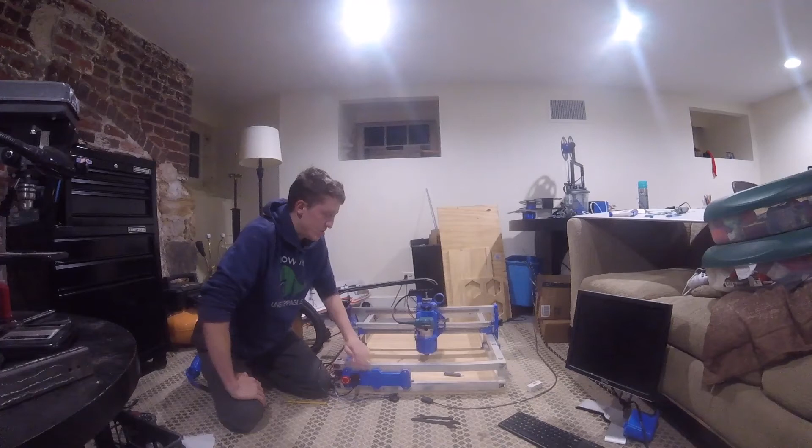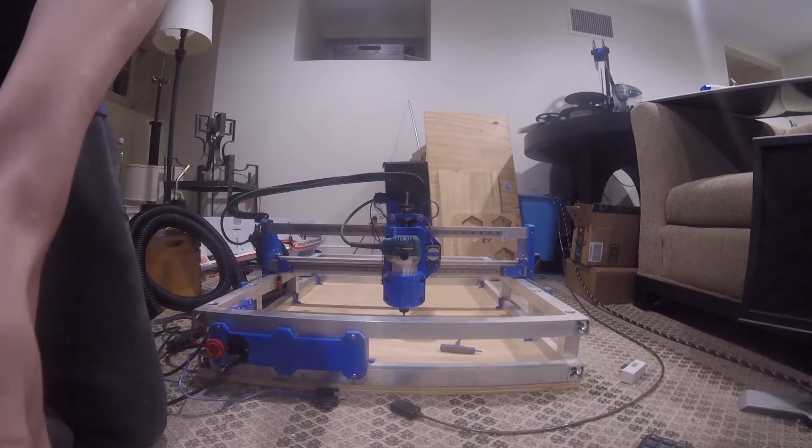I'm going to try and cut this down, we'll see how that goes. Alright, let's get a little closer. Hopefully you can see everything alright. I'm doing this on a GoPro right now, so I don't really know what you're seeing, but it should be decent.

So this is my 3D printed CNC router. Well, it's partially 3D printed. The blue stuff is 3D printed. This square stuff is aluminum tubing, and then this stuff is some sort of steel, I'm not sure. But anyways, this is a 3D printed CNC router.

It was not designed by me, it was designed by Ivan Miranda on YouTube. I'm going to try and post his channel and the plans that he posted in the description, because it's really awesome and you should at the very least check it out. I'm not saying you should build it.

But a CNC router, there are two parts. CNC is kind of just a type of machine - it takes commands from a file called G-code and moves around accordingly. It's kind of vague because you can make a lot of things CNC, but the router bit is just a router. It's basic, sort of similar to a drill, obviously very different, but there's a little spinny thing down here that'll cut stuff. So it moves around pretty precisely with instructions from a computer and cuts stuff.

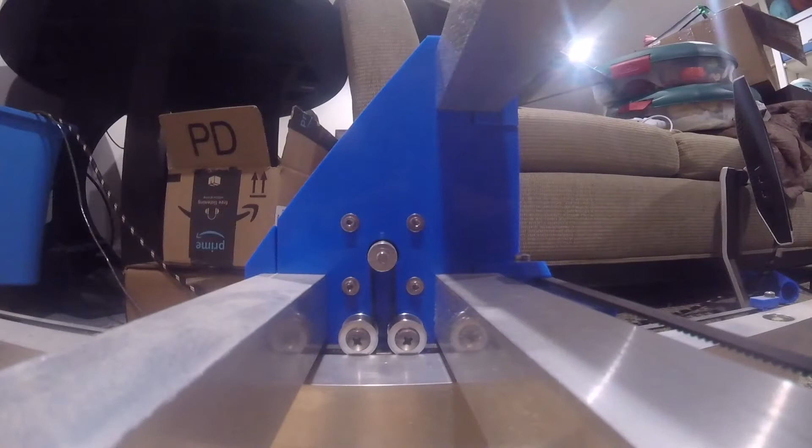Okay, so hopefully you can see this. There is a motor on the other side of here, you can't see it, it's there, trust me. And so it can spin. One of the greatest questions of mechanical engineering is, how do we turn rotational motion into linear motion? This is one way to do it. This little thing has some teeth on it, this belt also has teeth on it. So when this spins, it moves it back and forth.

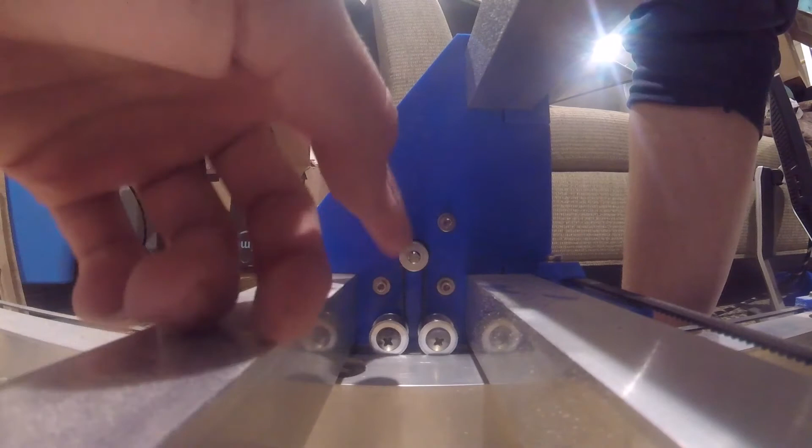So I'm going to move the y-axis right now, and you should see that motor turn. There it goes. So if you're wondering how that's working, it's essentially just a flexible rack and pinion, that's how I like to see it. It's a little different, obviously, but instead of the rack we've got this belt, and instead of the pinion we've got this pulley. Alright, I'm going to bring back out now.

So that's the drive system, and all the wires for that are routed through the machine, and also in these cable carriers. Let's see, what else should I talk about? I'm going to talk about one more thing on the electronics, and then I'm going to talk about how it's built.

I want to touch on these limit switches. There's one there, you can probably see this one. Basically those limit switches are positioned at the end of travel. So if I didn't have those there, it's going to keep going and keep going, and because I am only human, I make mistakes, and sometimes I will accidentally tell it to move somewhere that it's not allowed to move. There are ways to make it so that doesn't happen, but they're pretty involved and I don't like them. This solution is better, for me personally.

Other solutions exist, but basically if the machine goes too far, it's going to hit this limit switch. So if it goes, let's say, too far to the right, this limit switch will get hit, and there'll be continuity. There's just two wires coming out of there that are run all the way through this tube, then through the cable carrier, then into the Arduino, and the Arduino will be like, oh shoot, the right end stop has been triggered, and it will shut off the machine, and it'll be like, hey Vann, the limit switch went off, what the heck happened? And it'll sort of tell me off, and I have to fix it. But yeah, that's what those do.

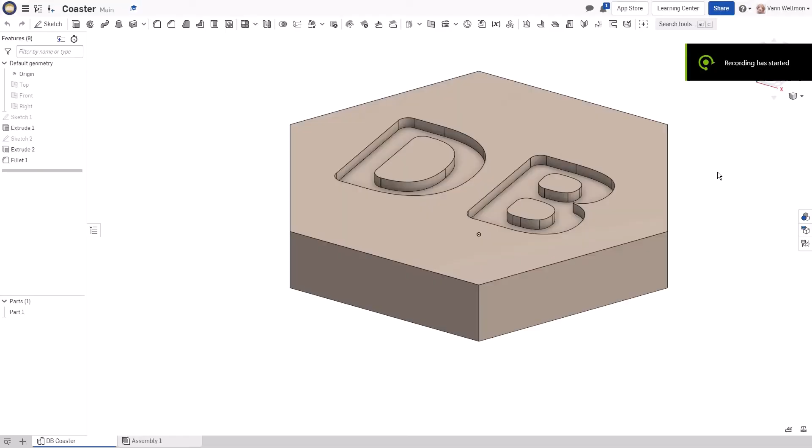I'll meet you over there on the computer and talk about the workflow. Here we go - this is my CAD program. I use Onshape, it actually works in my browser, which is pretty neat.

Today what I'm making is this coaster for a friend. You can see it's pretty simple - just this hexagon, about 18 mil thick for reference. It's pretty thick, but that's because I've only got some pine sheet to work with, so it is what it is. And then we've also got these letters cut in.

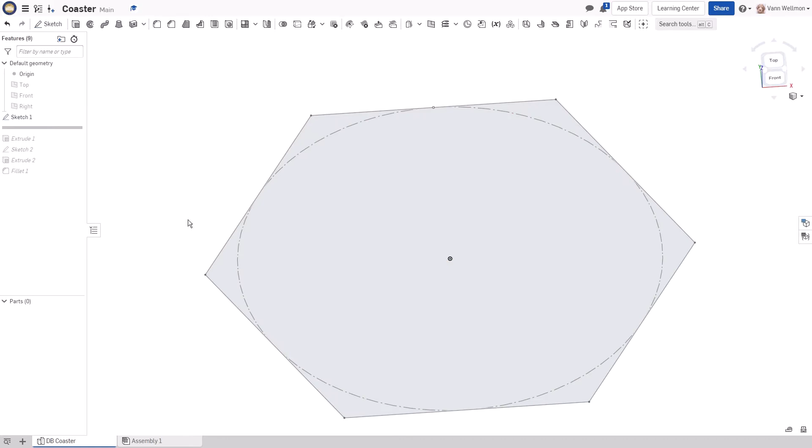If you don't know what CAD is, it stands for Computer Aided Design. Essentially what you do, at least in this program, is make a 2D sketch and then do what's called extruding to turn it into 3D. So basically I drag it out, and then I do the same thing for that text.

I just sketch it on there, and there are a bunch of tools and methods you can use to get that sketch. Once you've got it, you can just extrude it out - obviously there are a bunch of ways to extrude as well. This is all pretty simple as far as CAD goes. And then I just threw in some fillets.

Those aren't necessary, but because of how machining works, this corner can't be 90 degrees, at least with the way that I do it - that's not possible on my machine with my methods. So the fillet is also here so I can really see what it's gonna look like. Because if I did this, I could get external corners since the bit can go like this, but it's gonna leave a radius there.

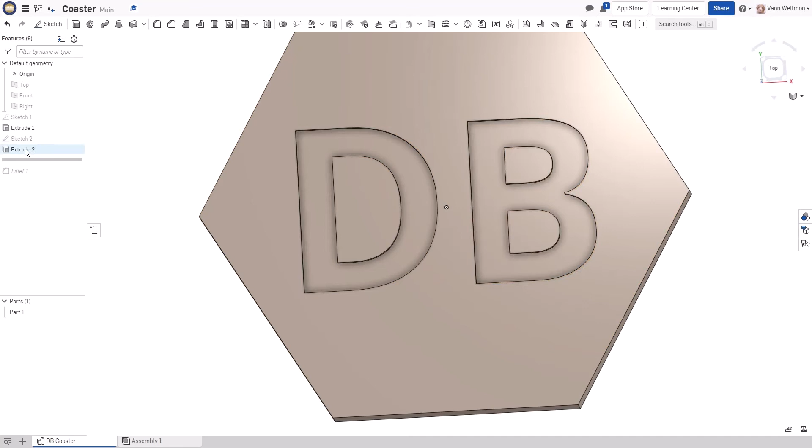So I just put those fillets on there so I can see what it looks like better. And if I thought this looks bad, I could try and rework it some. That's about it for the CAD, though.

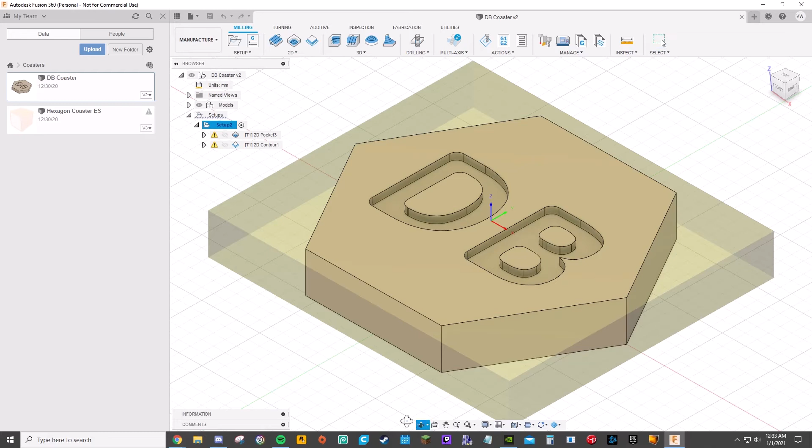I then just export it as a step to my CAM program, which is Fusion. CAM stands for Computer Aided Manufacturing, as opposed to Design, which is what CAD is. Basically this generates what's called G-code, and G-code is what my machine can understand. It's telling it what places to move, when to move there, how fast, all that stuff.

So in Fusion you sort of go left to right along this toolbar. You start by making a setup, so we tell it what the coordinate system is—I want this to be left, right, this to be forward, back, this to be up, down. Then I also define some stock, so it knows what we're making this out of.

The actual piece of pine is bigger than this. We don't need to model in the entire thing, so we've just got this rectangle around it, and it's going to remove some of that stock. It's not going to remove it all, just what it needs to.

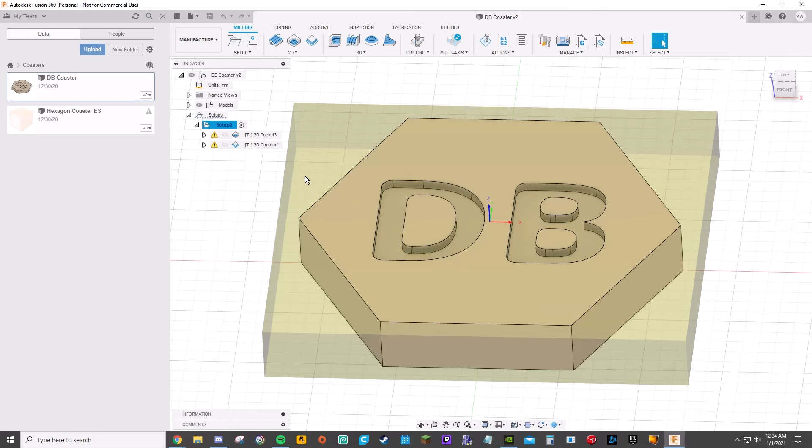So our first tool—and first off, this is what's called the tool path. It's just the path that the tool is going to follow here. This one is called the pocketing operation, because it's making this pocket. It won't let you see what it is, but basically we're coming in here, going in, and then going around, knocking all that material out.

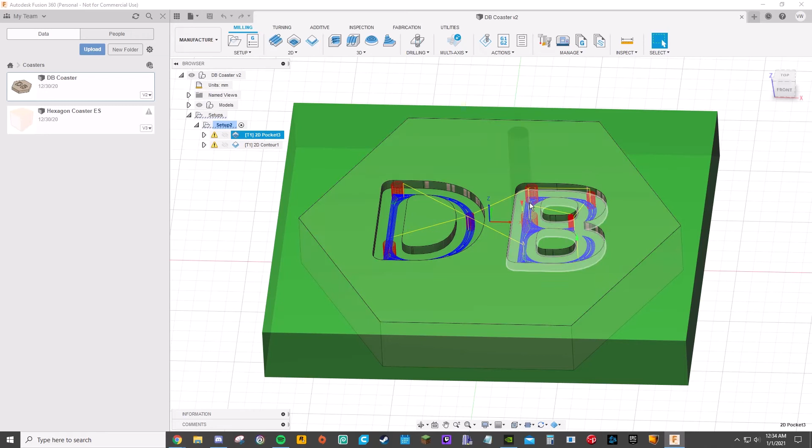Okay, so that's the pocketing operation. That's how we're going to get our text for the coaster. Then we do what's called a contour.

I'm sure there are lots of things you can do with a 2D contour, but they're often used to cut stuff out. So we're just going like this. And you might be like, what are all these blue lines for? We're doing multiple depths, basically.

My tool, and my machine as a whole, isn't capable of making this entire cut in one go, so it does it in a bunch. I could maybe do it in less than this, but it gives me a nice finish and it works. So I do it.

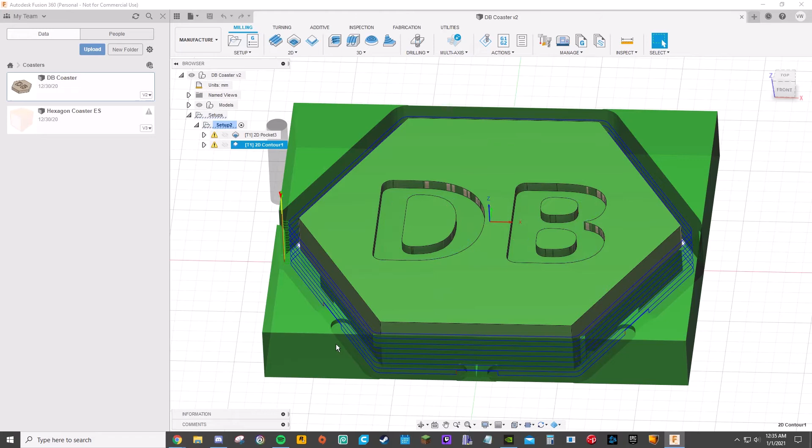Oh, one last thing of note—these little things right here, that's intentional. Those are called tabs. Basically they keep the model in place the entire time, so even once we've finished it, it's still locked in, because we have screws here and here and here and here and whatnot. If we didn't have these tabs in here, there would be nothing holding this in place, and it would rattle around.

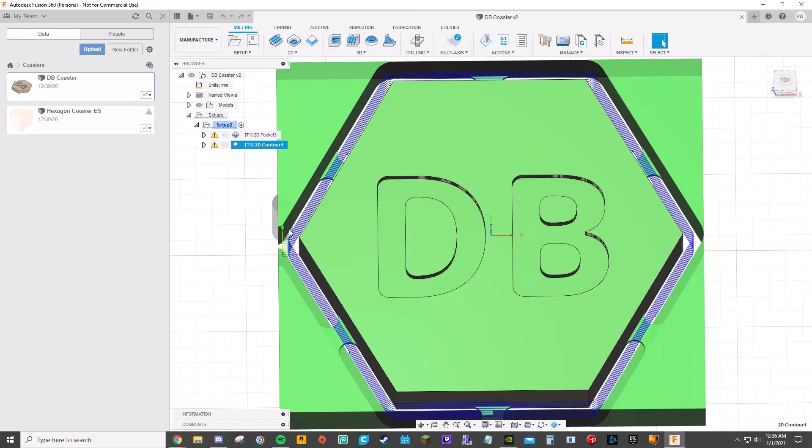It would hit itself up against that bit. It could hurt the machine, but it's more likely to just hurt the piece, and that would look bad. It's not dangerous, but you don't want stuff like that happening because it's unpredictable.

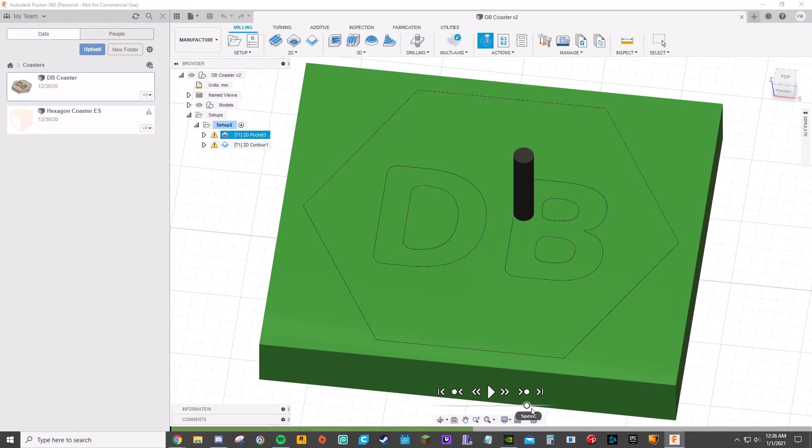I'm not very good at explaining things, so Fusion can simulate the toolpath, so I can just show you the entire toolpath. I'm going to click start. You can see it goes in, and then it comes around and cuts everything out.

Okay, and then now it's going to do this contour toolpath where it just cuts everything out. And right here you see it kind of comes up some. Let me slow it down. Okay, a little faster, bud. Come on.

Basically it's going to do that to clear chips, clear dust. It also gives me a good chance to come in with the shop vac to get some of this stuff out. Because it's wood, it's pretty generous—if I was machining aluminum or something, it'd be a lot more important to get these chips out because they could clog up the bit.

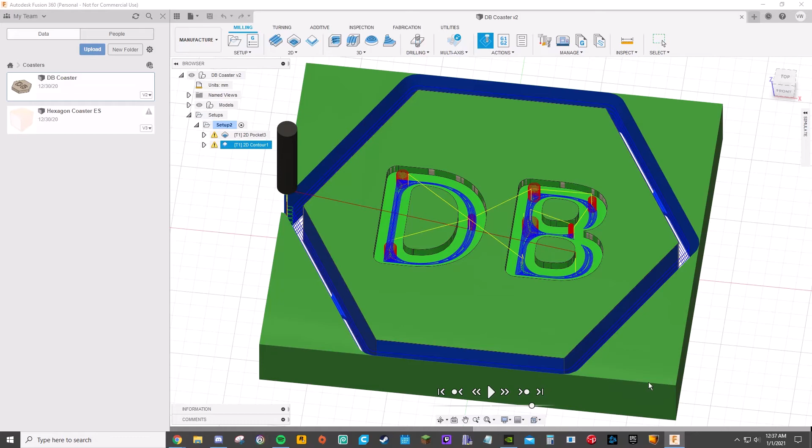But because of the way this works, it basically just turns into dust. It's okay for the machine to do it again, but it's still good practice to clear it—you don't want all that sitting there. So it just keeps going, cuts everything out, and it's done. You can see we've still got our tabs in place. This green stuff is the stock.

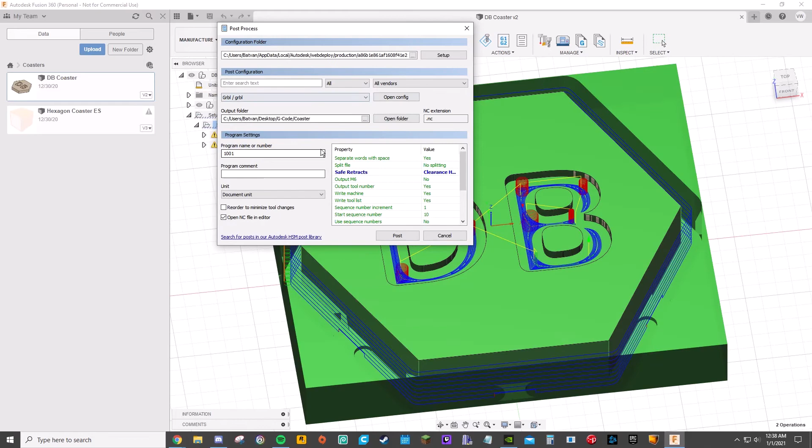And yeah, that's about it for the workflow from idea to CAD, where we model it, then to CAM. And then last, what you do is post-processing, which is this - I'll just go ahead and post it.

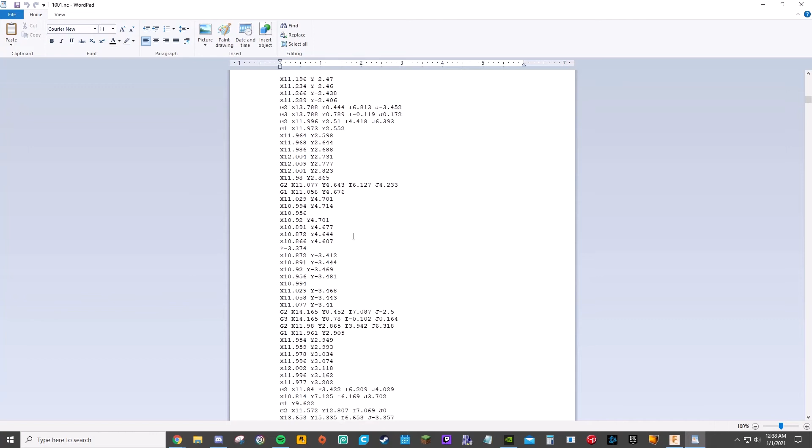This just generates all of the G-code, which is basically what the machine can understand, so it knows what to do. After that, we use the G-code sender to send it off to the machine, and then we get a part. That's about it for the workflow. I'll see you back at the machine.

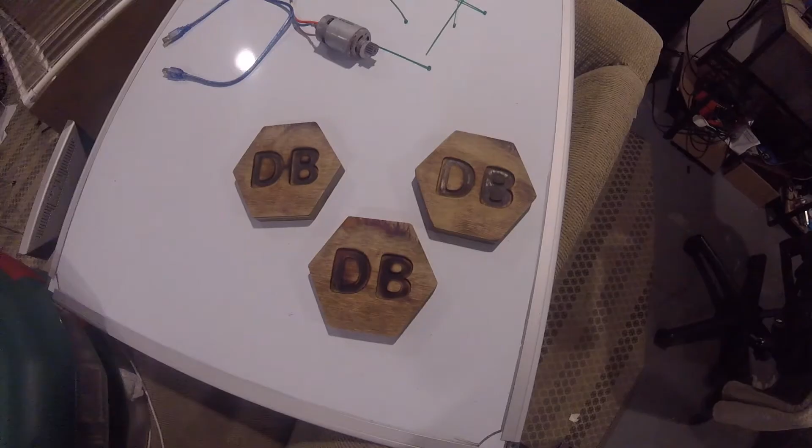One last thing before I go back to the machine, to recap - these are the coasters I was making. I made three of them. They're hexagons, and the wood has a bit of character in some places. The only finishing I did was sand just a little bit. It comes out of the machine really clean though, but I want that to be uniform since people are using this - even if there's just one splinter, that would be bad.

So I sanded them, and then I used a blowtorch to burn the wood. I'm still not certain if I like it or not, to be honest, but it gives it some contrast, which is nice. Then I used Danish oil to give them their color. If you see the wood in the video, it's much lighter.

Alright, I'll see you in a sec. So I just showed you the CAM process, what happens in CAM as well as CAD, and I also should have shown a brief video of it cutting. That part did actually fail due to operator error, but I still got some more that worked.

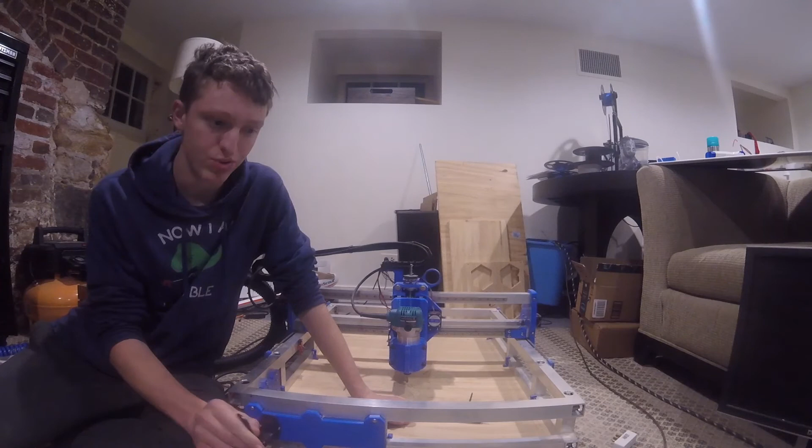So those are going to be going to their owner in a few days - I think tomorrow. They're drying right now, I put some finish on them.

But I wanted to really quickly talk about my experience with this project and how it reflects on it, because this has been my second big project that I've done essentially solo. I obviously had people help me online, forum answers as well as Discord stuff, but I didn't have a partner for this, I guess you could say. It was just me.

So if you've seen my Drift Trike video - that was probably the least enjoyable part of that project, honestly. That project was awful. I didn't know what I was doing, which I think is true of most challenging projects, but it was done in a way that the documentation just wasn't there. I really like Colin Furze, but it just wasn't documented. So I was never confident if it was going to work.

I didn't have anyone with me throughout the project where I could say, hey, is this a good idea? Am I going down the wrong road? Is this a good way to do this? So it was a lot of just guessing. I'm not gonna say I lucked my way into doing it, but I definitely think it could have just not worked for a lot of reasons, and there were points where it was just like I got lucky. I think you get lucky in all projects, but that one especially - it was a lot of, I just wasn't pleased with it.